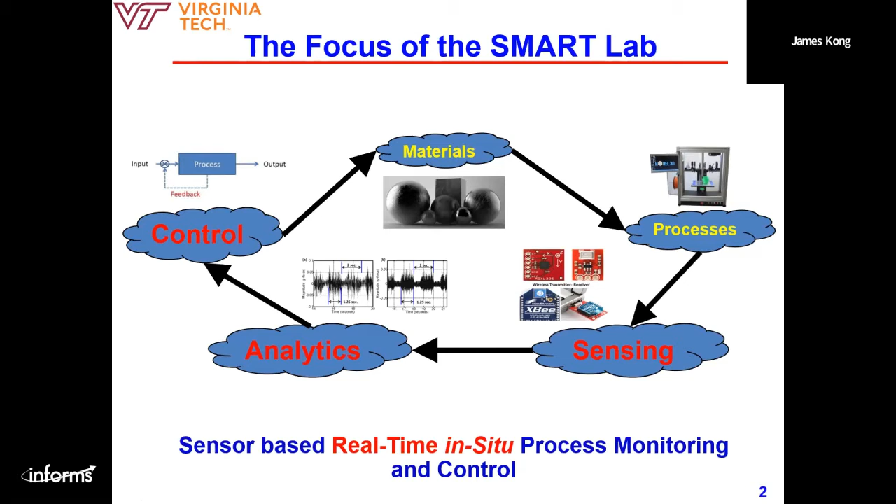So I can easily justify the needs, why we need such great efforts, and also I can use this to identify my collaborators, to showcase my strengths. Okay, so here's the outline.

At the beginning, the first part, I'm going to introduce some apparatus setup. In my lab, I have a pretty big lab with different types of machines. I'm going to introduce what kind of platforms we have and what type of data we can capture and collect.

Afterwards, the big chunk of slides focuses on smart additive manufacturing. I have two types of data. One is online, meaning the data is collected during the printing, so we need to make real-time decisions. The second is offline, meaning we do the printing and afterwards collect data once it's accomplished, for example, with a 3D scanner.

So for such data, what can we do? Let's end with a little summary. This is a smart additive manufacturing platform focused on metal material, which is what we just accomplished, quite recently.

This is a customized platform. We purchased a simple laser engraver, very cheap, but essentially it's a powder-based platform for metal material, for example titanium 64, and also Inconel. I think one great feature is we put a lot of sensors in.

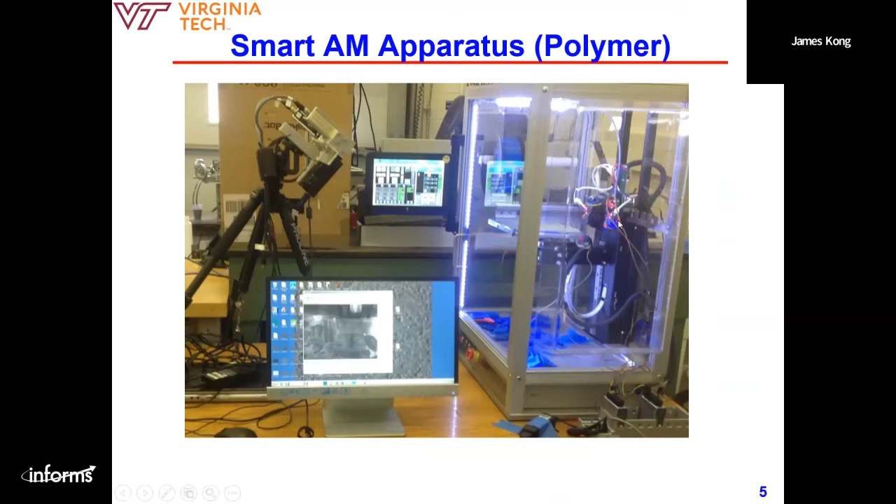This is for the metal material. This relatively simple one is for the polymer material, an FDM machine. As you can see, roughly we have the 3D scanner. Here it's not very clear, but we have also many sensors in, which you can see from the next slide.

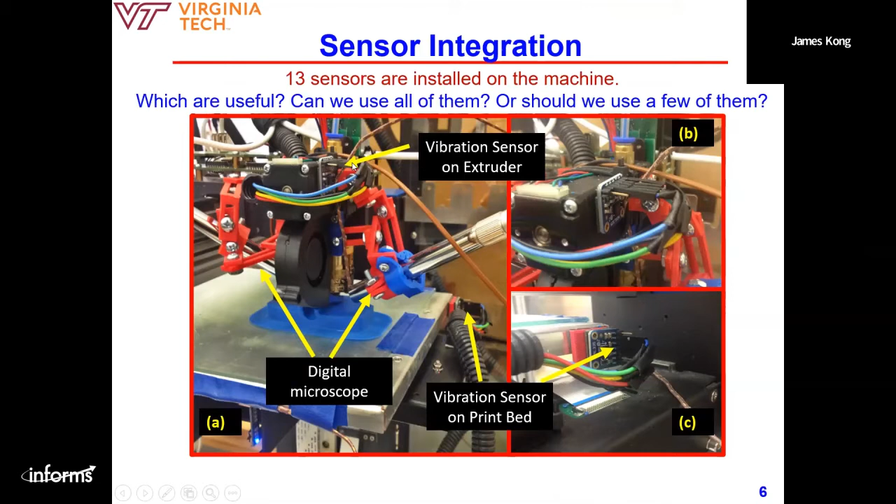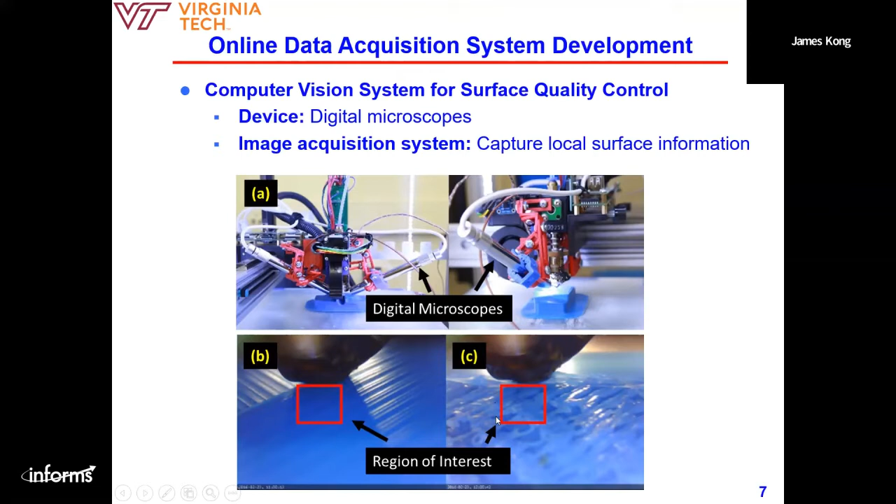Here we put vibration sensors, a digital microscope, and vibration sensors installed on the printing bed and also on the extruder. So it's more pictures about the sensors, especially the digital microscope, which is essentially a high definition camera, and during printing we can capture in real time the image of the surface being printed.

So the fundamental idea here is we have different sensor signals. This is one example of the temperature signal. Our fundamental idea is to correlate the sensor signal with... let me see if I can show my cursor.

Are you guys able to see my cursor? Okay, we have different behavior of sensor signals. We try to correlate them with the printing quality. Most times it's normal, maybe abnormal printing, but sometimes we do see failure. So are we able to tell, without physically looking at the printing, what's the current status—whether it's really normal or some failure happened?

So some of this is perhaps pretty easy even from the sensor signal—you can see here the signal behaves very differently. My cursor disappeared. But sometimes, most of the time, it's really hard to see anything by eyeballs, so we need help from data analysis and signal processing.

Nowadays machine learning is so popular, everybody is claiming they are doing machine learning. So all those tools are so helpful for us to perform such a task, to correlate sensor signals, and figure out what type of sensor feature is so sensitive to capture the printing quality.

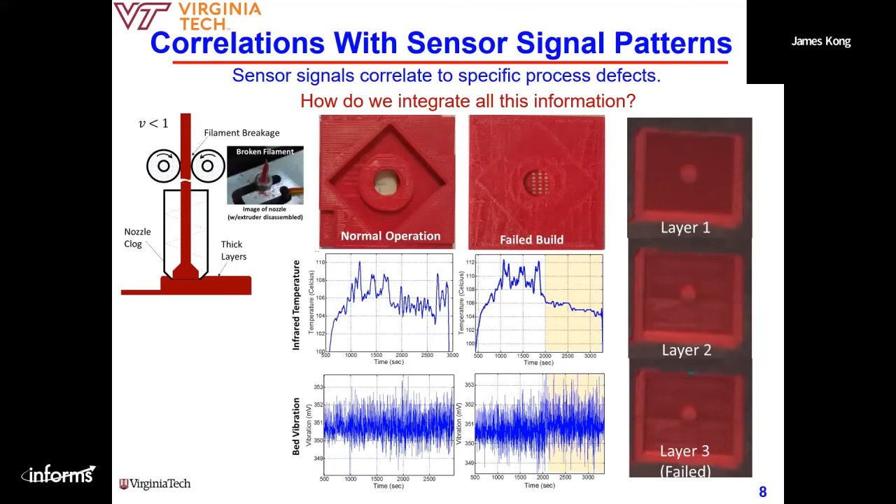And hopefully the video is working. So this is just to show the image-based online surface quality monitoring. We have the digital microscope which can capture in real time the surface of the 3D printing, and then we can perform image processing to quantify or even classify the type of operation as normal, failure, or something in between.

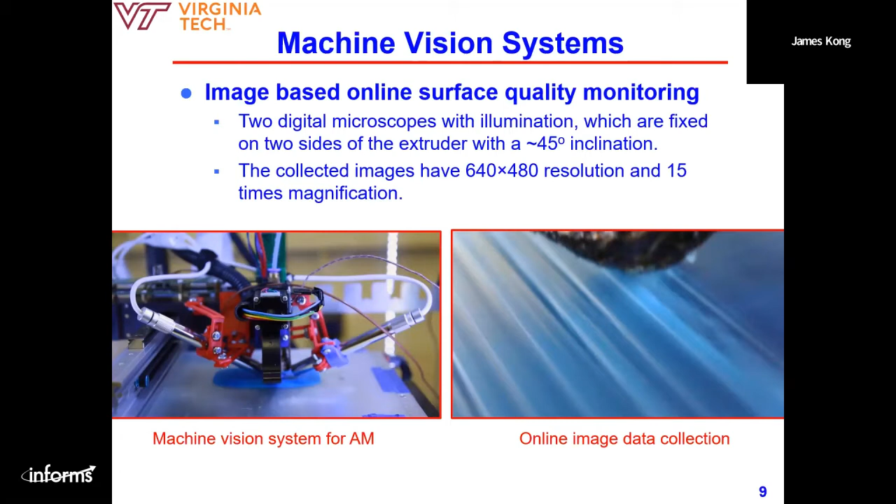And also we have thermal cameras—we can capture the part surface temperature distribution. And this is very unique: in our lab we developed a high resolution 3D scanner. This 3D scanner can scan either the entire part surface or a local area, depending on our quality requirement. Sometimes we may only focus on one specific area with very complex geometry, so we just focus on one small region.

Although you see these two cameras, this is just components, critical components of the 3D scanner. Essentially there's a structured light based 3D scanner, which provides the 3D point clouds that can easily, within a couple seconds, provide millions of data points. Each point is X, Y, Z coordinates.

In the commercialized machine, usually the spatial resolution is about 10 to 20 micron, which means the pixel to pixel, point to point distance is 10 to 20 micron. With our further development with some special lenses, we are able to achieve 2 to 6 micron of spatial resolution, which is very high.

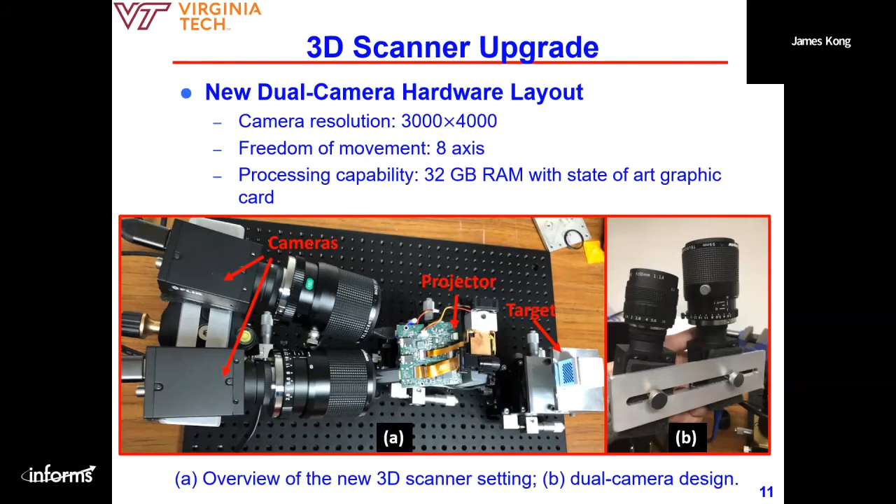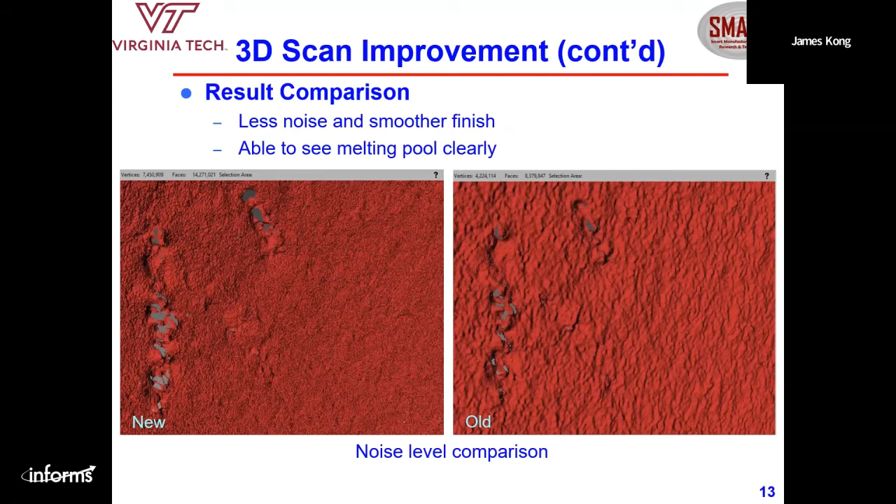This is more before and after, with old and new. You can see with our improvement the spatial resolution was improved significantly. We can observe some features which were previously hidden from us. Of course, observe means we need to develop some advanced technology, for example deep learning, to automatically capture some features instead of observing manually. Again, more samples to see the before, old and new, and the significant improvement of the scanning.

This is another device called digital image correlation. It's still based on this kind of scanning technology, but previously, what we saw the scanning was static. Okay, whatever the part after the printing, we scan the surface to see the surface quality in terms of the millions of data points.

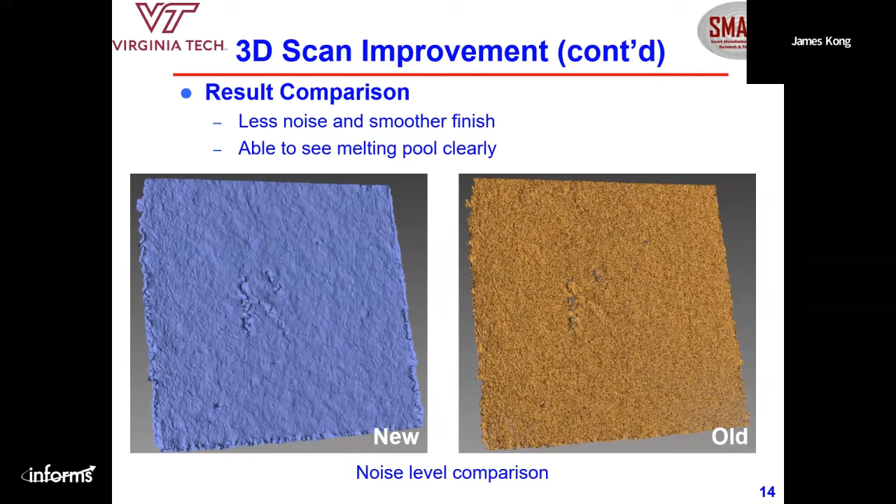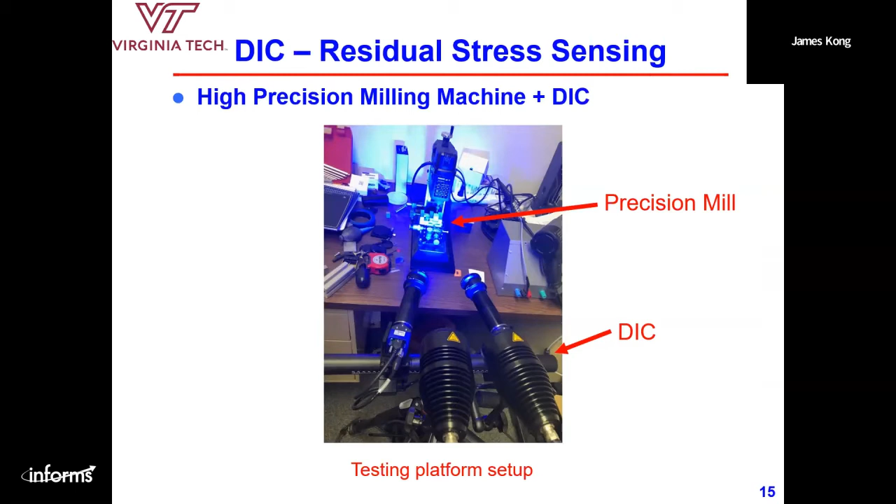But this digital image correlation is dynamic, which means we can possibly capture the surface dynamic change during the printing, for example the residual stress and even the strain. So we are able to capture that, and then we can correlate those measurements with the printing quality.

They have this advanced equipment and device, and each part, I think this part is only 15 by 15 millimeter surface area, but to scan each of them needs about a couple hours, which is very, very time consuming. With our structured light scanner, for each surface, we only spend like 10 to 20 seconds, and it's much, much faster.

And the result in terms of surface finishing is, of course, there are some errors. We're still in the process of improvement, but it's reasonable, and some of them quite close.

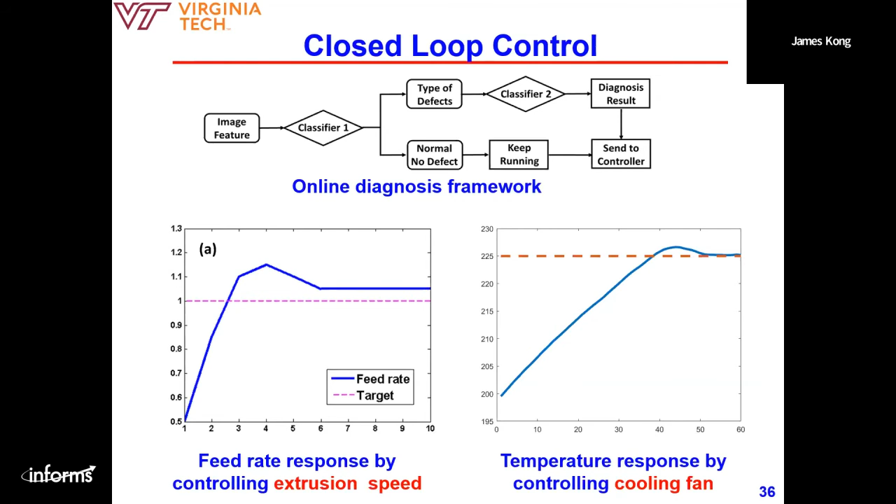The next couple of slides introduce an interesting area, AM cyber attacks. This is the problem description. I want to showcase this part.

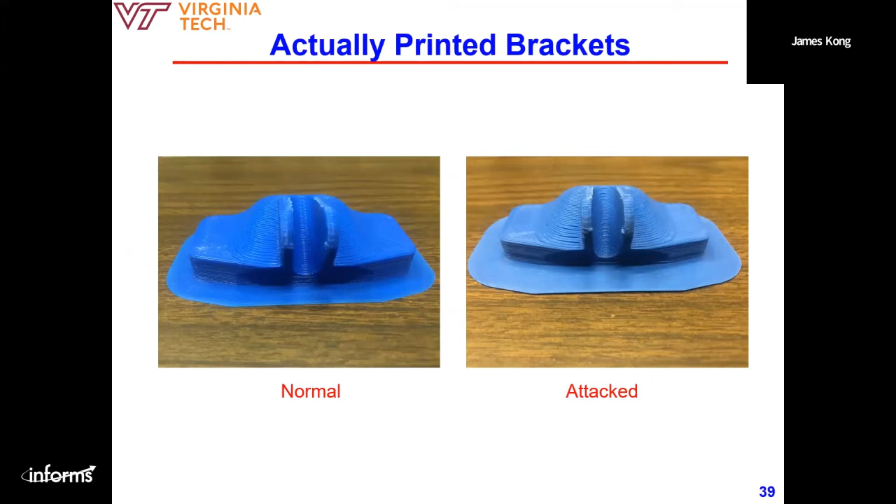This is a part we printed using our 3D printer, polymer material. They look the same, identical from external appearance, but internally they're different, because the attacked one has a hole. We can imagine a hacker logging into our computer and inserting an undesired hole into our STL data file, and then the slicing software generates G-codes from this file, but we don't know it. After printing, we're not able to observe it at all from the appearance. So what we want to do is, using our classical technique of the SPC control chart...

During the 3D printing, are we able to develop some sort of SPC control chart based on the sensors to detect that something is wrong during the printing?

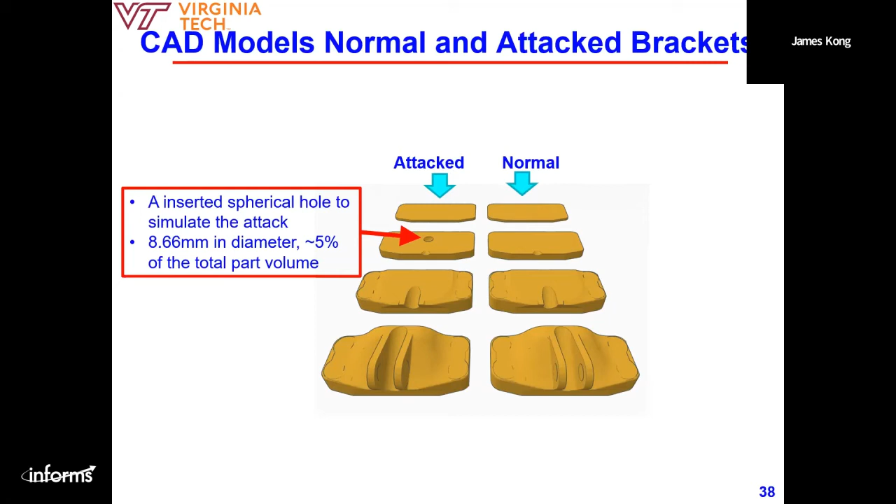And then we develop, again, using the graph theory-based method. A couple minutes ago, I introduced how to use that one to do image analysis. Actually, it can be used for any multivariate data. In this case, we use graph theory-based method to extract features.

And then we use the SPC control chart. We can well separate the attacked parts and normal parts, which means if the part is really attacked, which has a hole inside, it was successfully detected. But for the part which is still normal, there's no false alarm.

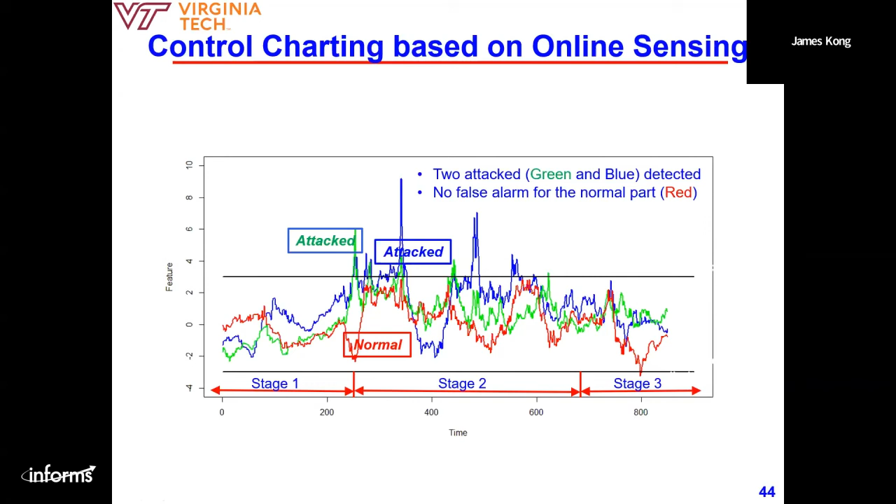Okay, so just now I introduced the online data. Online data means the data were captured during the printing, while the printing is still going on. Next couple of slides, I'm going to introduce offline data. The offline data is after printing. We do either scanning and/or some X-ray analysis, so then we have a very thorough inspection for the quality.

So the first one is micro CT. We use micro CT to scan the parts and see the patterns of the porosity. Porosity for metal printing is what we really do not want to see, okay? In bio printing, perhaps that's what we want, to make the biomaterial more similar to the actual material with some porosities. But again, for the metals, we do not want to see it.

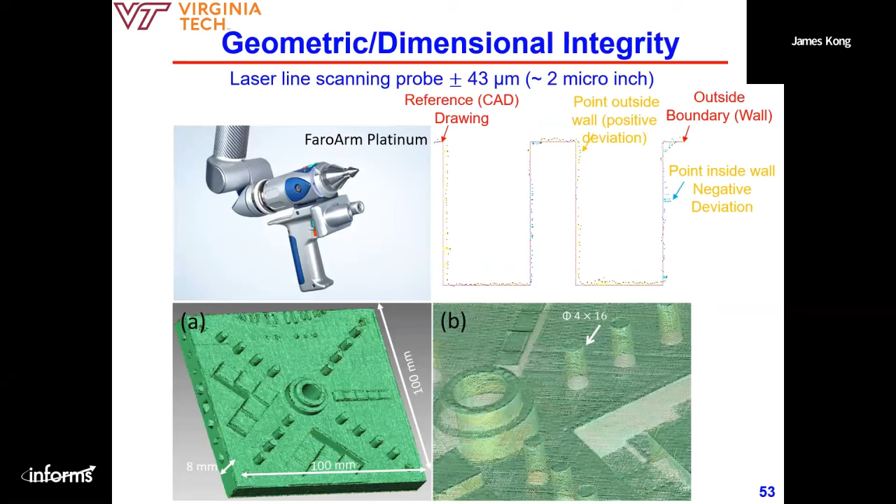This is the scanning data. Again, this is the 3D scanning data, you can see parts 1, 2, 3. These parts have a lot of small features, right? And this is a standard part, with standard features designed by NIST. They purposely design different types of features, and then we print these features. We can measure those features to see the performance of the 3D printing.

Okay, this is collaborative work with Oak Ridge National Lab. They printed the same part with different materials and different platforms, and then scanned it. Each part they scanned, they printed 3 parts with 3 scannings. Each of them has around 500,000 data points. They did not tell us what's the material and what is the platform, they just labeled them as part 1, part 2, part 3.

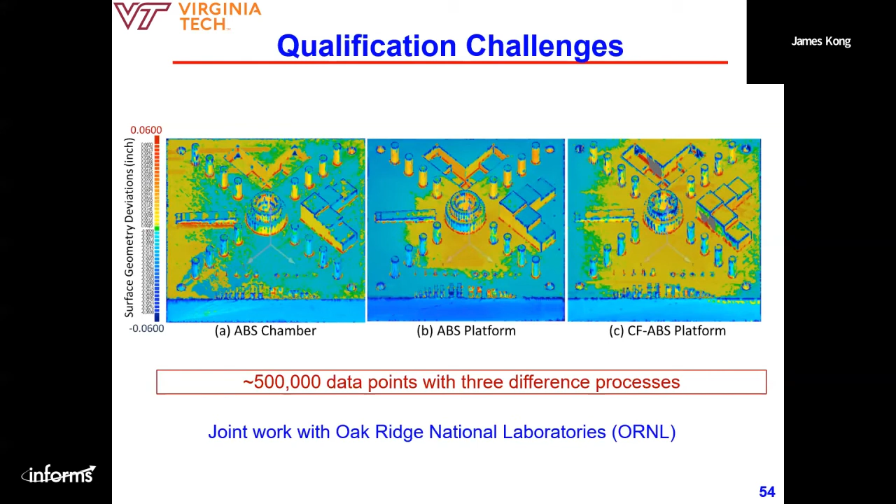They already have some quality inspection results, but they wanted to really test the performance of the graph theory I introduced a couple minutes ago. So we use our graph theory method. This is a review of graph theory again, I'll just skip it. Then we use the Fiedler number. The Fiedler number is the lower the better - lower Fiedler number means the better quality.

Through our analysis, we show that carbon fiber with ABS platform achieves the best quality. ABS platform - the quality is the worst. ABS chamber is something in the middle. At that moment, we did not know what the material was. We could only tell, okay, this data set is the best, this data set is the worst, etc.

And then the researchers, our collaborators at Oak Ridge National Lab, told us what material and what platform each one was. Our analysis was pretty much identical with their discovery. So they were quite happy with the performance of our graph theory based method, and we co-authored one paper published in the ASME Transactions of the Journal of Manufacturing Science and Engineering.

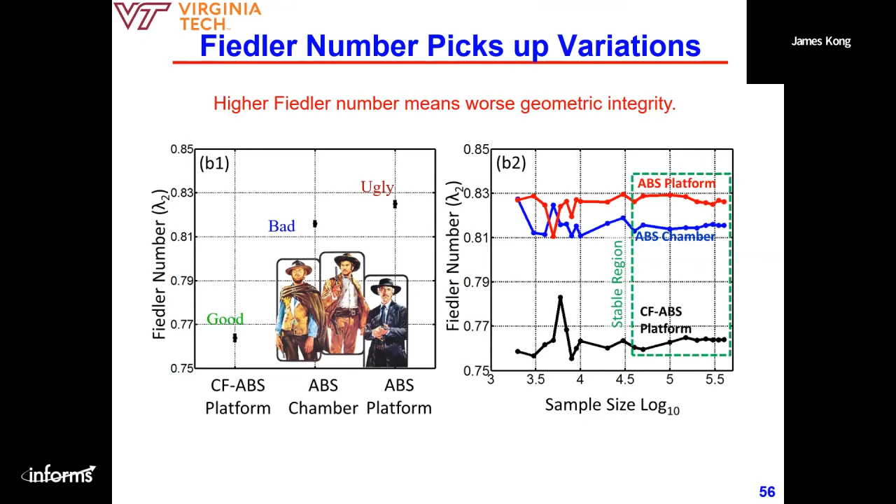For additive manufacturing, and for most people including myself, I do need collaborations, I do need people from different areas. We can also use this framework to identify potential collaborators. Okay, so I think that's all of my talk, any questions? I do see one in the chat.

How is this aggregated data used to control the printing itself, like stopping it?